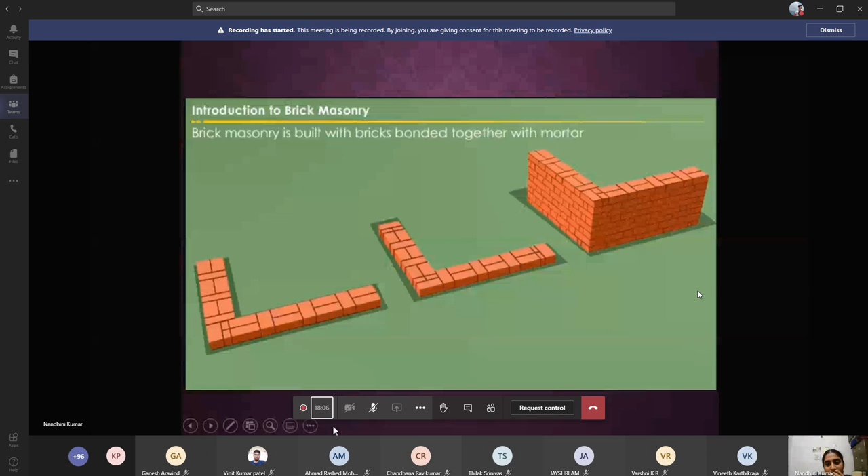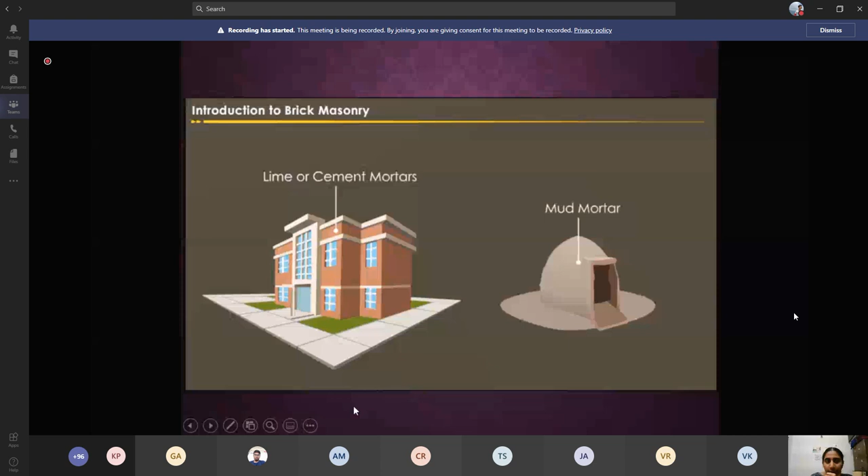This is how they transported. First, they transported the materials using the animals they had. They used elephants, bullock carts, even donkeys to carry the lightweight materials. Then they started laying tracks. But then they wanted to carry it very easily, pulling it with minimum man force. So what they did is they did waxing on the tracks, which would reduce friction, making it easier for them to pull the materials.

And we have seen about what is a brick, what are the sides of the brick, how do you name it, and a few portions we have dealt with. Now we'll continue with the portion called closer. What is closer?

Okay. What is a closer? A closer is a small piece of the brick cut lengthwise. You have a brick in this portion, you cut it lengthwise in such a manner that its longer face remains uncut, and it is used at the end of masonry walls to maintain the bond pattern. This is called a full brick. You cut it this wise. It may be a quarter, a half, or a 3/4 portion.

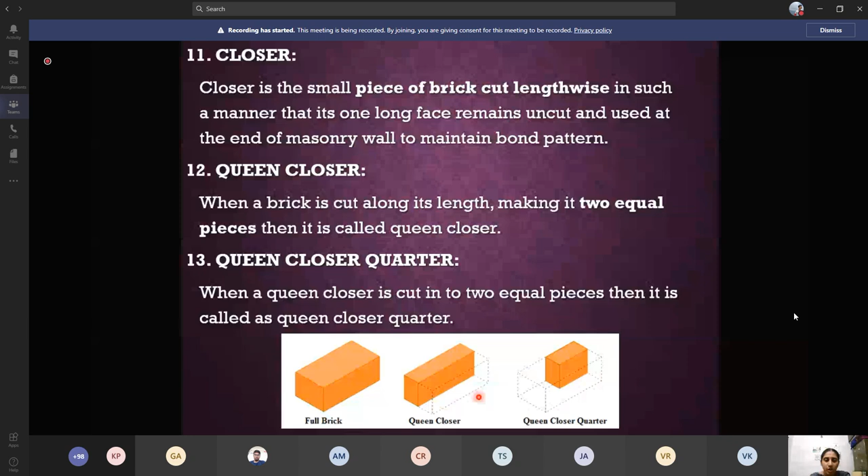Queen closer is nothing but the equal half. You cut it into equal halves. When a brick is cut along its length, making two equal pieces, then it is called a queen closer. What is called a queen closer quarter? You know, this is a queen closer. Only the quarter part of the entire brick is called queen closer quarter. When a queen closer is cut into two equal halves, then it is called a queen closer quarter.

What is a king closer? King closers are the portion of the brick obtained by cutting off the triangular piece between the center of one end and the center of the other side. This is one end. From this center to this center of this side. From your header to the stretcher, you take the midpoints, you cut it. The remaining portion is your king closer.

What is a beveled closer? It is similar to the king closer, more or less. The shape is triangular, which you cut. Similar to the king closer, with the only difference that the whole length of the brick is beveled. This entire length you are going to bevel. You take a midpoint along your header side, mark a midpoint here, and you just slice it till the other edge of your stretcher.

And what is a mitred closer? It is a brick whose one end is splayed or mitred for the full length. This you just cut. The angle of splay is either 45 or 60 degrees. What is a perpend? A perpend is nothing but an imaginary vertical line which includes the vertical joints separating two adjacent bricks.

What is racking? You have seen this type of finishing over many buildings. Racking back or toothing back, this you'll be seeing. Racking back will be in lawns, some parks, some common public areas. You'll have this in malls for the outer elevation. There's no need to provide these racks, but they provide them only for the architectural view.

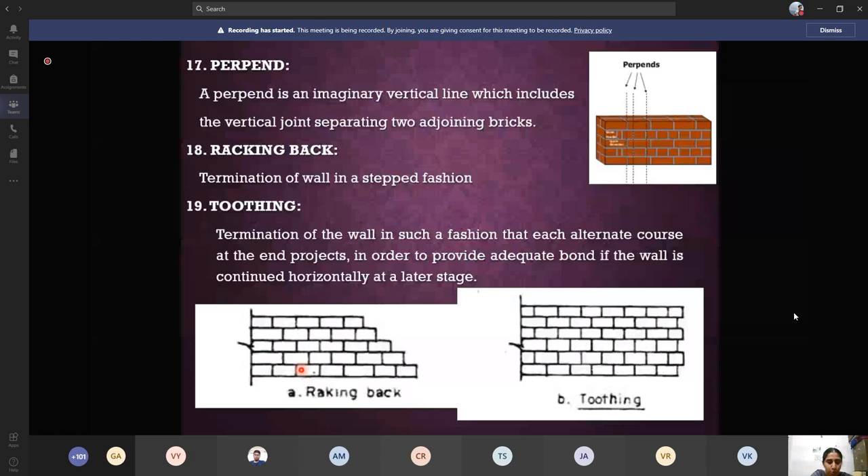Next, what is lap? We already saw course, joint, bed. One such type is lap. The horizontal distance between the vertical joints of successive bricks is called lap. And we'll move on to the mortars which we use in brick masonry.

What are the different types of mortars we use? Mortar binds the bricks and makes them act as a homogeneous mass. The following types are used for brick masonry: lime mortar and mud mortar, which were used in the ancient period. Then we started using cement mortar. And now cement lime mortar and lime surkhi mortar. These are all the things we are using.

Bonds in brick masonry. Bond is a method of arranging the bricks in courses. You know what a course is? Horizontal laying of bricks is called a course. The individual bricks are joined together. Vertical joints are broken so as to ensure distribution of load on the lower courses. An artistic effect is created when the brickwork is left unplastered.

Have you seen a brick wall unplastered in any building? Yes, ma'am. A lot. Yes, that would really look good rather than finishing it with plastering works. You'll be pouring either cement slurry or lime slurry, over that you have to go for your plastering, and over that you have to follow with your painting of this much thickness, initial coat, final coat.

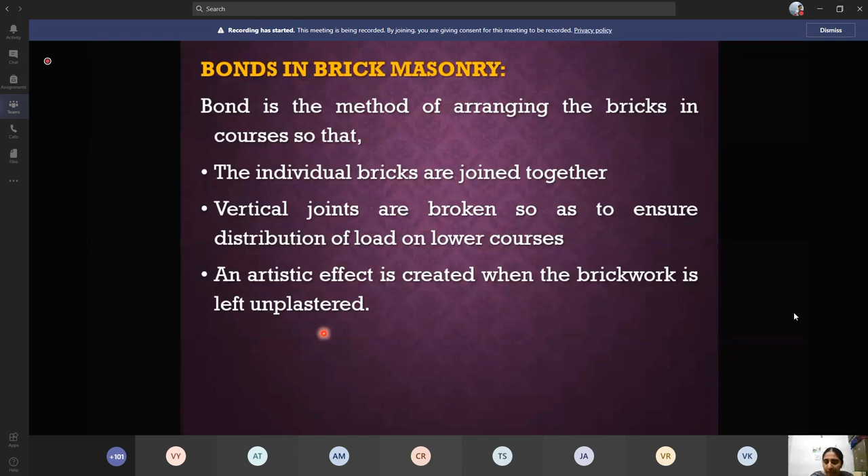And extra fittings means your extra architectural paintings. So this many layers can be cut when you're going for brickwork left unplastered. What are the rules to be followed for bonding?

The length of the brick should be equal to twice the width of the brick plus the thickness of the mortar joint. Uniform in shape and size. All the bricks should be uniform. Yes, only then we can go on for a constant wall construction. If one brick size is differing from the others, then we have to push it and arrange it in order to get it tightly packed. That will not be good, and that will not carry proper load to your structure. Make sure whenever you are at the site, check whether all the bricks are constant.

Lap should be at least 1/4 brick along the length and 1/2 brick across the thickness of the wall. Use of brick bats should be minimized. Vertical joints in alternate courses should be along the same perpend. We saw perpend is the vertical line. In alternate courses, the center line of the header should coincide with the center of the stretcher in the course below it. You have a header bond and a stretcher bond. Both the midpoints, or the center of gravity CG, should be the same.

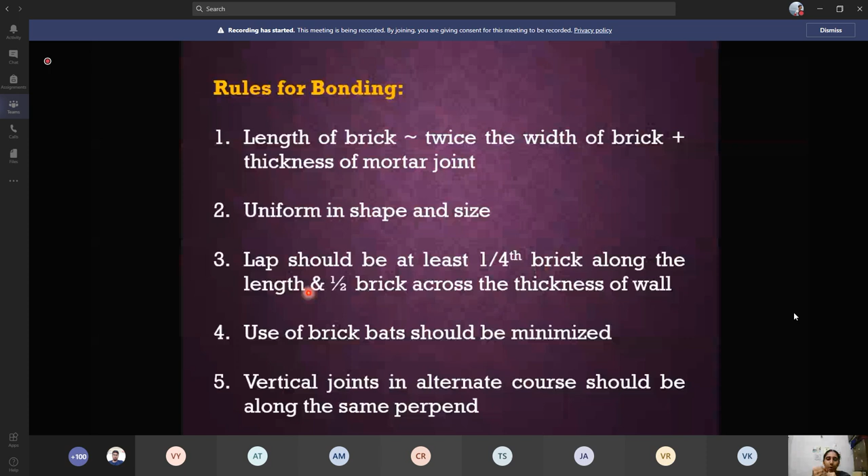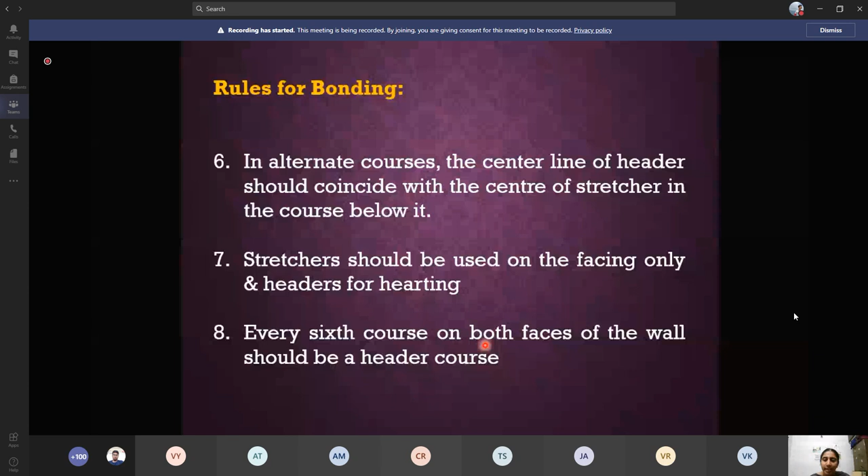Stretchers should be used on the facing only, and headers for hearting only. Every sixth course on both sides of the wall should be a header course. Always remember, these are the bond rules. I'll circulate these rules. You can have this for your reference.

Types of bonds. We have so many different types of bonds. Why are we bonding it? We are arranging all the bricks in order to get a proper bond, so that we'll construct a wall as well as transmit the roof load to the structure. There are several methods for securing this interlocking or bonding, as mentioned below. We have,

Yes, am I audible? Yes, ma'am.

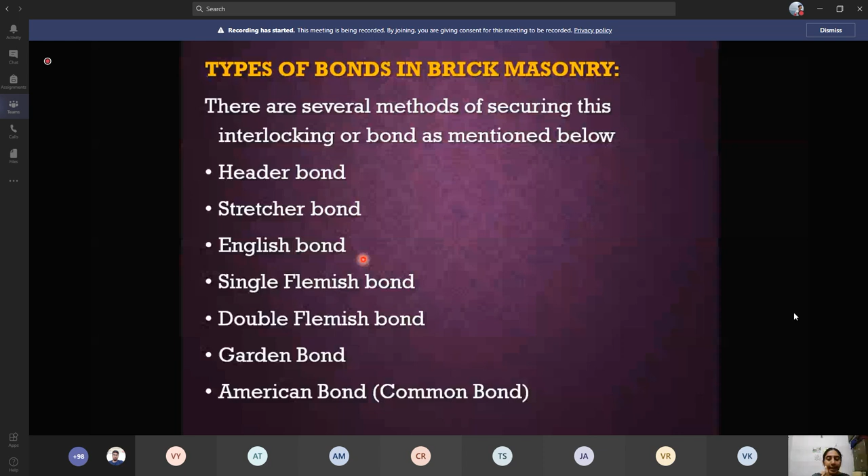Okay, thank you. Header bond, stretcher bond, English bond, single Flemish bond, double Flemish bond, garden bond, American bond or common bond. These first few are the most important. We generally call the main four bonds header bond, stretcher bond, English bond, and Flemish bond. Flemish bond is categorized into single Flemish and double Flemish. We'll see one by one.

This is called the header bond. We have already dealt with this brick. The top surface is called the bed. The front portion, that is the front view of the brick, is called the header. And this lengthwise face is called the stretcher. When you arrange all the bricks with the headers facing your front view, then it is going to be your header bond. Can you see this size is very less compared to your stretcher bond? For stretcher bond, you place your entire brick this way. For header bond, you'll be placing your bricks this way. I have a video to play.

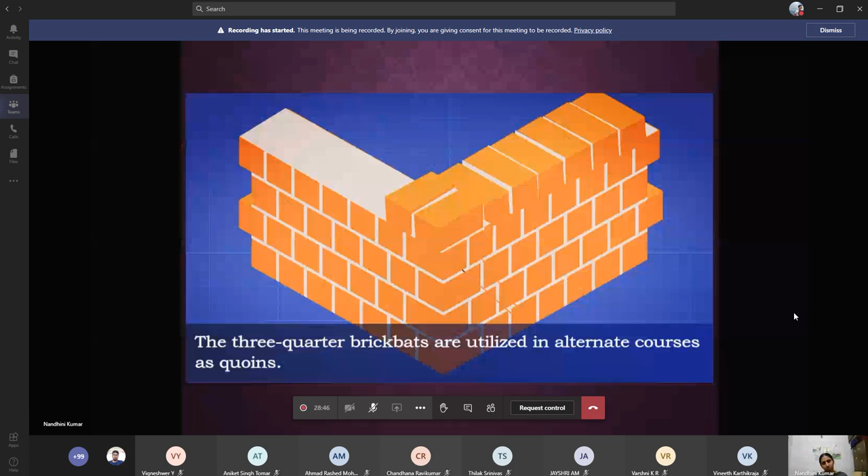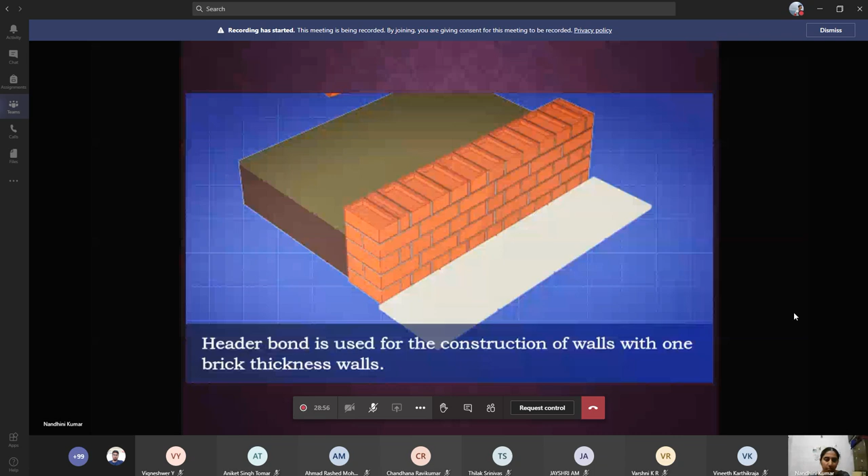Did you see the video? Yes, ma'am. Header bond is nothing but laying your bricks with the front portion in view. That will be your header bond. You have to construct your wall in that manner. I'll just highlight it and show. See, this is your header. This is your stretcher. And from this view, you're viewing the wall, so this is going to be the front view.

Here are your headers. Why should we arrange these header bonds in an alternate manner? Can you see this vertical joint and this vertical joint are not in the same position? They are in a zigzag manner. Why should we provide it that way? Cracks may develop. Yes, cracks will develop if you place one over the other. That vertical joint will be exposed easily to chemical or environmental attack. So cracks will develop, and that will not transfer your roof load to the foundation. It will break the proper loading structure. So you have to go for a zigzag pattern.

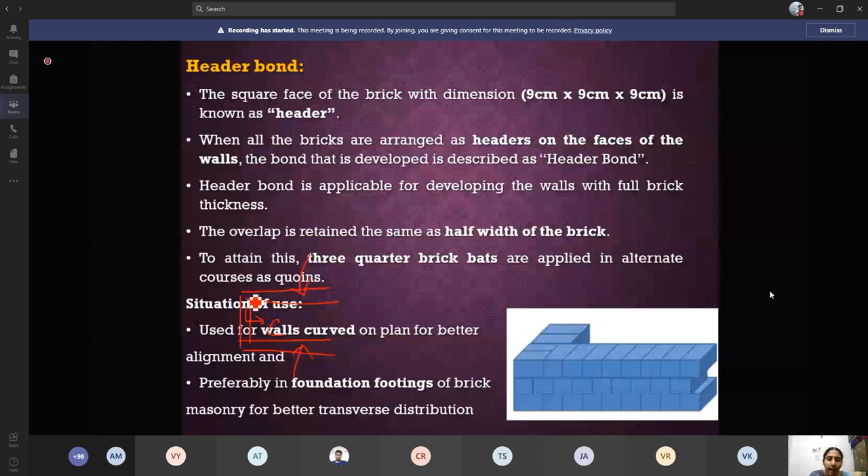This is your roof and this is your floor. Here is your column C. So this roof load can act on this column and this load is transferred to the floor or the foundation which you have beneath. This is in case of framed structure.

When you go for a load bearing structure, you will have only continuous walls, made of bricks or any type of material, maybe stone masonry or brick masonry, where the load will rest. How will this load be transferred? In order to transfer the load we are providing our quoins. Can you see? These things are provided.

Similar to the concept we saw here, if you place everything in the same vertical line, if you place this and this on the same vertical line, a crack will develop and the wall will not withstand the load. Similarly, if you keep everything the same header bond over here, then definitely the wall cannot withstand the load.

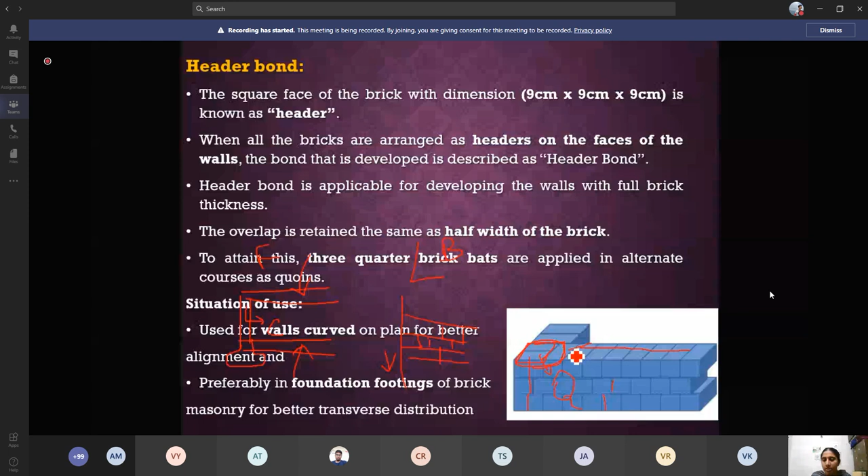In a framed structure you have the column here, but in case of load bearing you have only this corner, where the entire transfer of the load through both faces of the walls will fall on this area, so that is why we are providing the quoins there. And we'll see this. What is header bond?

The square face of the brick with a dimension 9 centimeter by 9 centimeter, the bond that is developed with it is described as header bond. In header bond, for developing the walls, the overlap is retained the same as half the width of the brick. To attain this, 3/4 brick bats are applied. In this corner, we are providing a 3/4 brick bat. In Tamil, they'll call it mukkakalle.

Then you place this in the cross manner. Then you continue with the header bonding. You may ask that this is stretcher. If you go to this side and view, then you can view the header bond. Situation for use: walls curved on the plan for better alignment, and preferably in the foundation footings of brick masonry for better transverse distribution.

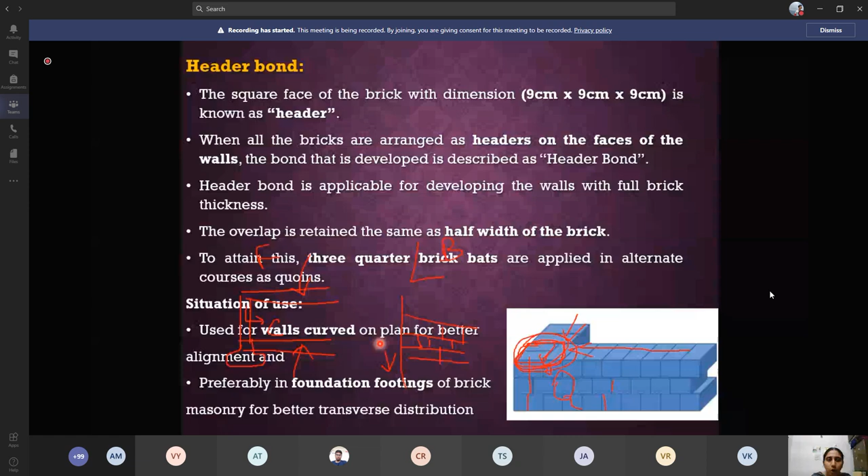Here you can see we have placed our quoins. This brown color means it is highlighted as 3/4. Can you see it is 3/4? This is the full length and this is only the 3/4 length. In a similar way, here it will be only 3/4. That also we have to place in an alternate course. This is the 3/4 bat.

This is the plan of the header bond. You draw a simple plan. Have you completed your engineering graphics in the previous semester? Previous year? Yes. Yes, ma'am. You know what a plan is, what an elevation is. Yes, exactly. Plan is the top view.

If you place your header facing towards you, then if you stand behind this wall and see where the length will be, the plan exactly will be this stretcher face. So it will be arranged in this manner. And you can see the 3/4, followed by the continuous wall of header bonds. And this is going to be your elevation. Can you see this continuous line which represents that this wall is getting extended?

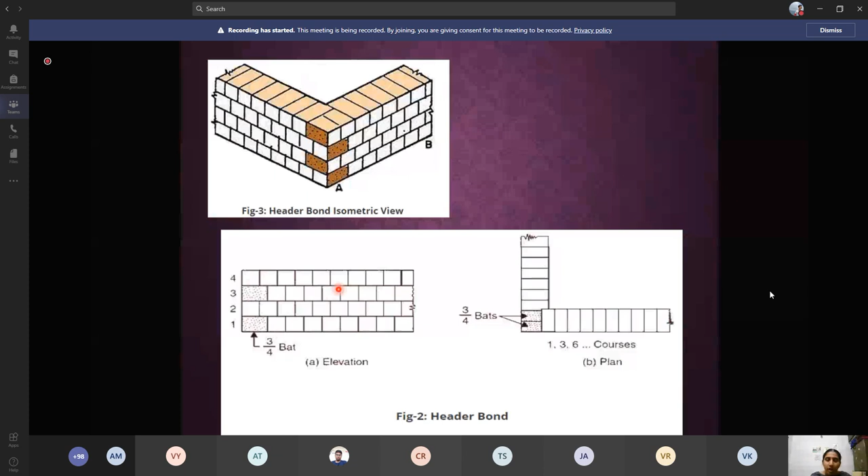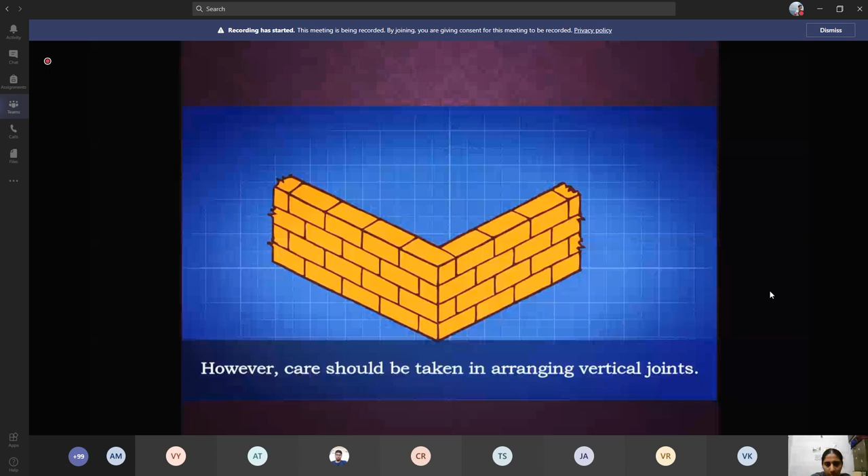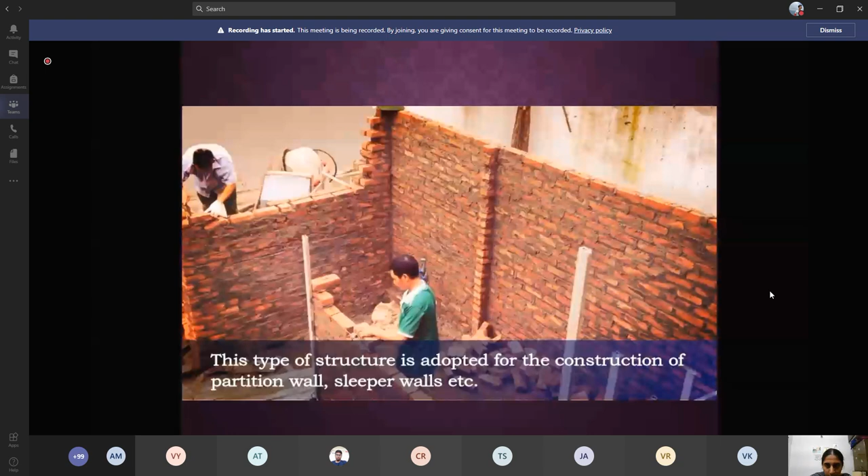Okay. Have you seen this video? Yes, ma'am.

Okay, stretcher bond: the bricks that are placed horizontally like stretchers, you are placing in this manner.

If you were on campus, it would be easy for me to take you to the lab one day and have it arranged there to show you practically. But in this situation, we should not stop our learning, which is why I've uploaded all these videos for you.

The length of the brick remains along the horizontal direction of the wall. This is effective to build walls with a half brick thickness. The normal size of the brick is 9 x 9 x 18 or 19 cm. If the wall thickness is 9 cm, then the stretcher bond will be ideal. This bond will be effective for walls having lesser thickness.

Consider a wall having lesser thickness. When you construct a house, always remember that only the outer portion, the outer walls of your building, will be thicker walls. Do you agree? Are you aware of this? Only the outer structural wall.

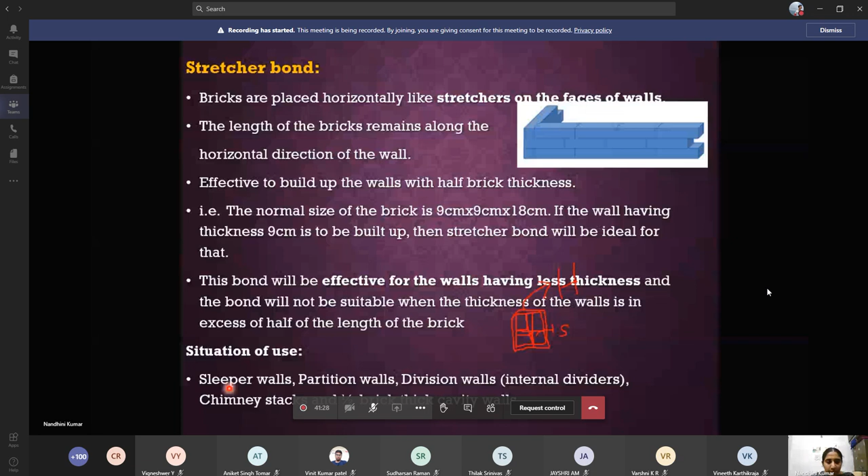You know your stretcher bond, you know your header bond. Now you are going to merge both and construct the English bond. Is my network connectivity low?

Yes ma'am, your mic is kind of disturbed, your voice is not audible clearly. Okay, I'm sorry, just hold on a second, I'll be back. Is it okay now? Am I audible? Better, yes ma'am, thank you so much. If I'm running out of poor connectivity, please let me know. Okay ma'am, thank you.

This is nothing but the clubbing of both stretcher bond and header bond. You have your stretcher bonds at the bottom layer, and over that, alternate placing of header bonds. Again over that, alternate placing of stretcher bond—stretcher, header, stretcher, header. It's like a shuffling.

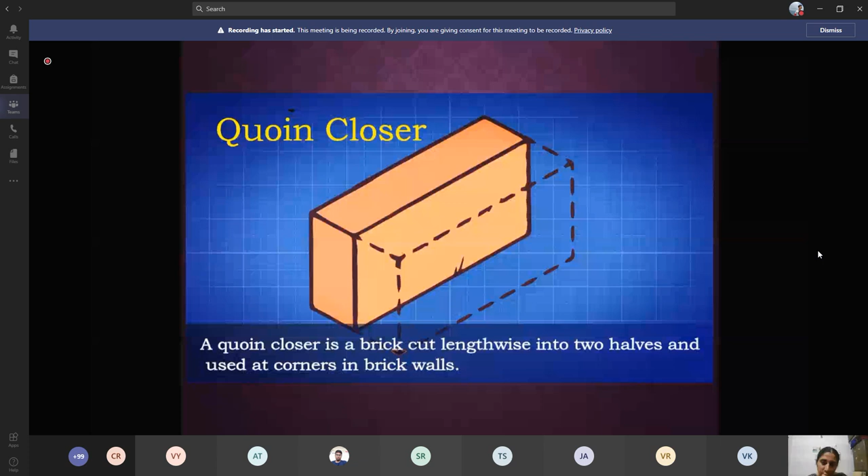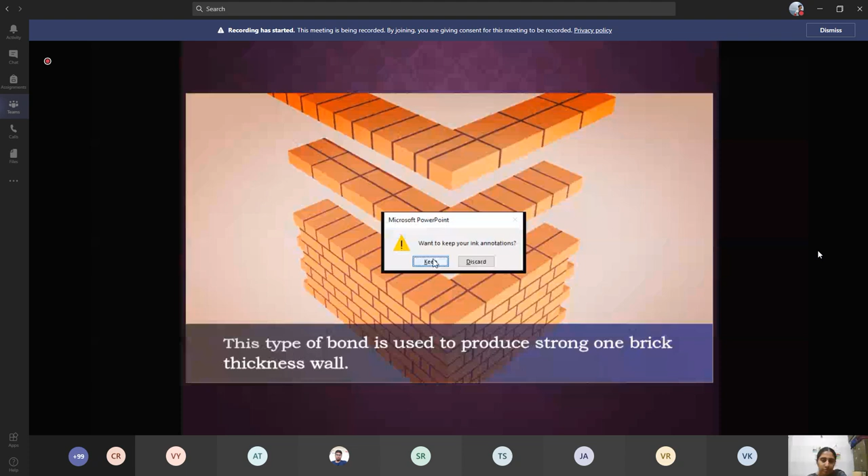Okay. Did you see this video?

Now we'll see what is English bond. The bricks in the facing are laid in alternate courses. As you saw in the video, it is one stretcher over one header. Here you can see, if you view, those are in header manner.

Over that, it is in stretcher manner. When you see along your right side of the wall, here the bottom layer is of stretcher bond. Over that, you have the placing of header bond wise bricks.

The header course is commenced with a quoin header followed by a queen closer and continued with successive headers. This is your header. You have a queen closer followed by the successive header.

The stretcher course is formed with the stretchers having a minimum lap of 1/4 their length over the header.

This type of bonding contributes substantially to the strength of brickwork, and may be particularly suitable for walls carrying heavy loads. These can be used in heavy industrial walls or structures where they deal with more of lifting loads. You'll be having many mechanical plants where you have to lift up many huge equipments. In that type of regions, you need to have this heavy load capacity.

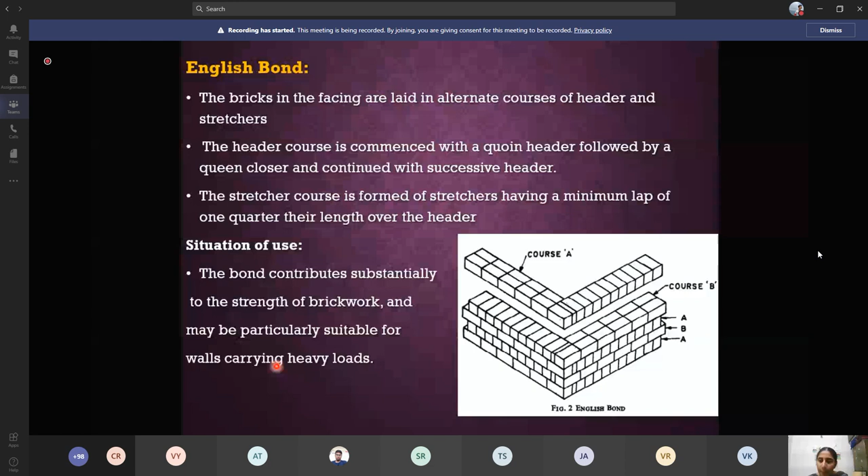And this is the isometric view of your English bond. Next, we'll see what is Flemish bond.

Again, this is stretcher, header. English bond was nothing but the alternate layer of bonding. But Flemish is nothing but alternate placing of bricks. You place header followed by a stretcher, header followed by a stretcher, in the horizontal manner, whereas English is in your vertical manner.

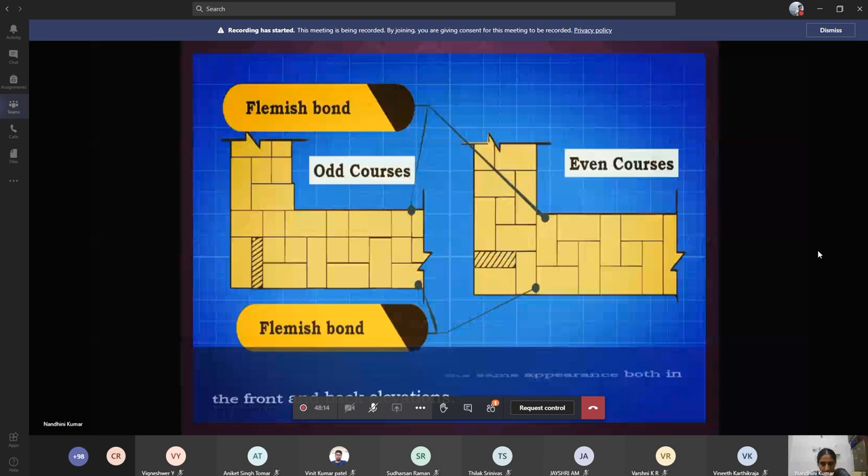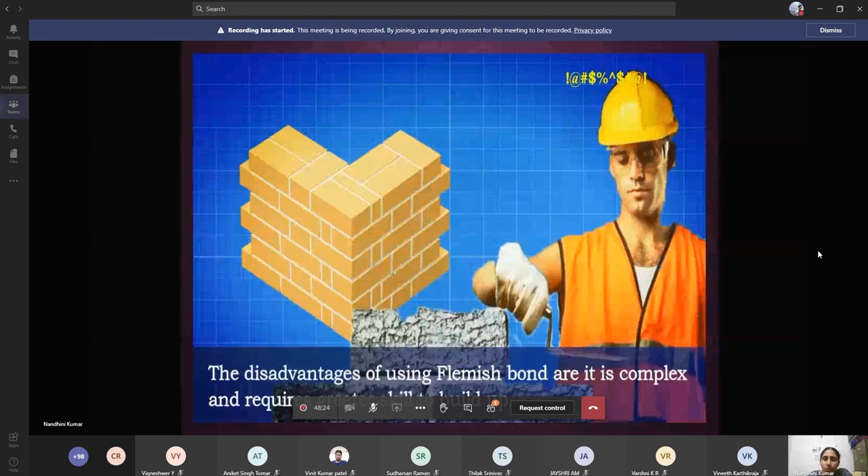Okay, now let's see what is Flemish bond. Flemish bond is also known as Dutch bond. It is created by laying alternate headers and stretchers in a single course.

The next course of bricks is laid such that the header lies in the middle of the stretcher in the course below. The alternate headers of each course are centered on the stretcher of the previous, the above, top or the bottom course.

Every alternate course of Flemish bond starts with a header at the corner. So you place a header, stretcher, header, stretcher, header, stretcher.

For the breaking of vertical joints in the successive course, closures are inserted in alternate courses next to the quoin headers. In walls having their thickness equal to an odd number of half bricks, these are used to achieve the bond.

The thickness of the Flemish bond is a minimum of one full brick, which means it is 190 mm.

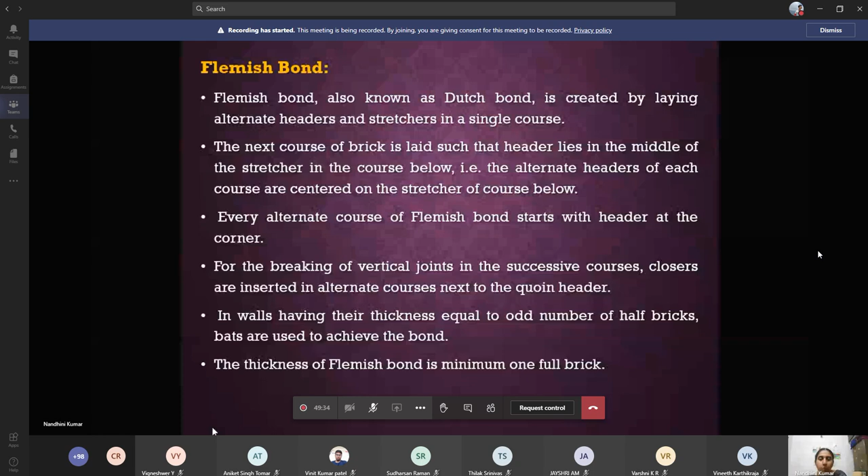What are the disadvantages of using Flemish bond? It is very difficult to construct because you should be very skilled. Only then you will be knowing.

Now you have placed your header, stretcher followed. This is the first layer, I'm speaking only about the front view. Over that you have to place your Flemish bond laying. So it will be difficult for any mason to place it in a timely manner. They have to take time. Only those skilled and professionally trained people will be able to place it in an exact manner. Normal unskilled laborers will be little confused and it will be time consuming for them.

So this is a major disadvantage of using Flemish bond. It has a better appearance but is weaker than English bond for load-bearing wall construction.

Thus, if the pointing has to be done for brick masonry walls, then Flemish bond may be used for better aesthetic view. If the walls have to be plastered, then it is better to use English bond. Only if you need the wall to be left unplastered, then you can go for Flemish bond. Else, if you're going to cover it up with plaster and paint, then it is suitable for you to go to English bond. And we have two types.